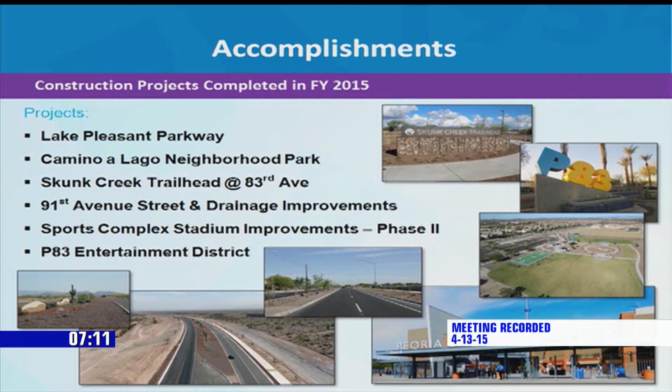Yes, on Lake Pleasant Parkway, we were approximately $1.5 million under budget on that project. I attribute a lot of that to the alternative delivery method that we used. We used a design-build delivery method, which was basically a 2-step process where we shortlisted a bunch of qualified contractors and design firms that teamed up together. We shortlisted 3 firms, and then we had them competitively price that project.

Because of that, we were assured that we were going to get a quality project from a contractor at a competitive price, which is sometimes not what you get when you just go with a straight low bid. Because of that and some other value engineering alternatives from that design build team, we were able to save $1.5 million on that project.

That savings went into the stadium improvements project, the phase 2 or phase 3 portion of the stadium improvements project that is currently underway.

Also on the 91st Avenue Street Improvements Project, we were able to save approximately $500,000. And then the last portion for the phase 3 improvements was the Truck Road Reliever Project, which also had a project savings of approximately $1.5 million. Not a bad day's work, huh?

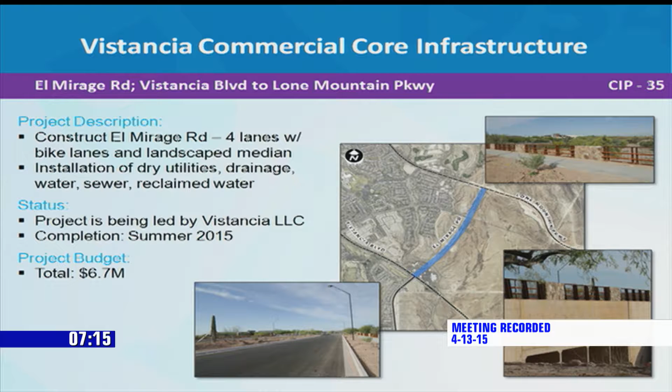Councilmember Leone: Yeah, I just want to ask you a question on that trail from Olive to Northern. When is that going to be done? I know they're working on it now. Response: Yeah, we anticipate, that's going to be one of my next slides, but we anticipate that to be completed this summer.

Any more questions? Sorry, go ahead. Our next project that we want to present is our Deer Valley Road improvements from 109th Avenue to Lake Pleasant Parkway.

This project was created out of a county project for the Deer Valley Road crossing from the El Mirage area, the Surprise area to the west, to 109th Avenue, that was going to increase the traffic on Deer Valley Road from approximately 12,000 cars per day up to about 30,000 cars per day. So we created a project to help reduce the impacts to the neighborhood from those traffic impacts.

It included intersection improvements at 107th Avenue to provide a signalized intersection, raised landscape median along that area for traffic mitigation and traffic calming. It improves the landscape basin on the northeast corner of 107th Avenue and Deer Valley, and adjacent wall improvements, which would be part of the phase 2 portion of this project. Let me explain more about that.

Right now, we're not sure when the county project is going to go forward, but we wanted to move forward with some of the streetscape improvements we had. So we phased this project so that the roadway improvements will be part of phase 1, and there's a phase 2 portion that we don't have a schedule for. We're waiting and communicating closely with the county on when their project will move forward, and in anticipation of that, we'll move forward with phase 2, which will include intersection improvements at 109th Avenue and Deer Valley, as well as raising the wall to mitigate noise concerns and traffic volumes along Deer Valley.

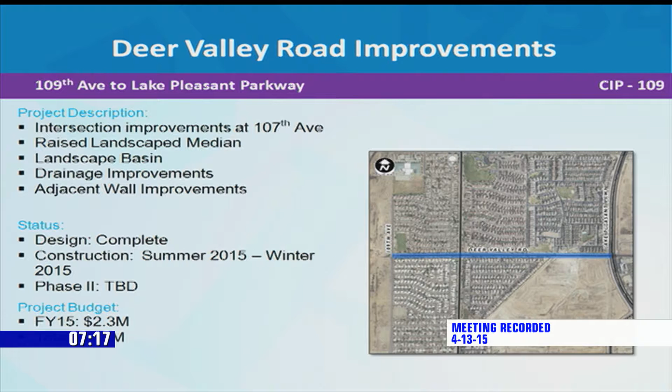The project Councilman Leone was referring to is our New River Trail from Northern to Olive, currently under construction. It's a federally funded, or partially federally funded, project that includes a combination of asphalt and concrete path with handrails, drinking fountain, and landscaping from Northern to Olive. It completes the Peoria southern leg of the New River Trail. When completed, we will connect to Glendale's trail system, creating a continuous trail from Bethany Home Road all the way up to Williams Road throughout the city of Peoria. We are also working to continue that trail north in the future.

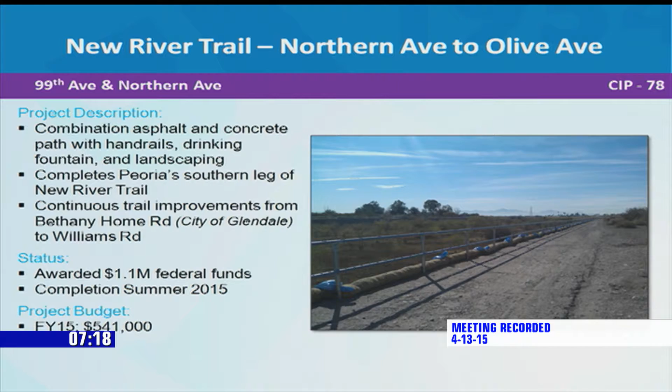Are we going to have any lights on there or something? I get people asking me about lights. They like to go walk through there at night, and since there's no lights, they're kind of scared they might see homeless people there, or coyotes coming through.

We currently don't have lights. Did I cross... a joke? Oh, I thought I said a joke.

Councilman Leone, mayor and members of council, one of the things we've evaluated over the past is adding lighting along the trail system. It's been a double-edged sword as far as maintenance of the lights, there's a lot of vandalism with the lights, as well as costs for the electricity. So we've looked at that. At some of the underpasses, like the Skunk Creek Bridge, we've added lights in areas that are a little darker, where you might potentially find people you may not want to find along the trail. So we've lighted those areas, but the entire trail system isn't lighted at this time.

I know there's some areas, like from Peoria on up, right behind the mobile home parks, where they don't want the lights. So you're going to get both sides, one wants lights and one doesn't. The ones who want the lights probably don't even live in the area, but the ones who don't want it live in the area. Right, okay, but it's not part of the scope of this project.

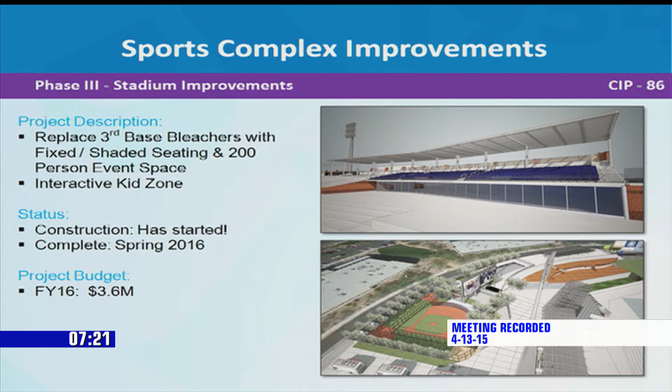We've got a significant amount of projects in design for fiscal year 2016. Here's a list of all our projects currently in design, or that will be starting design in fiscal year 2016, and we'll go through each of these individually.

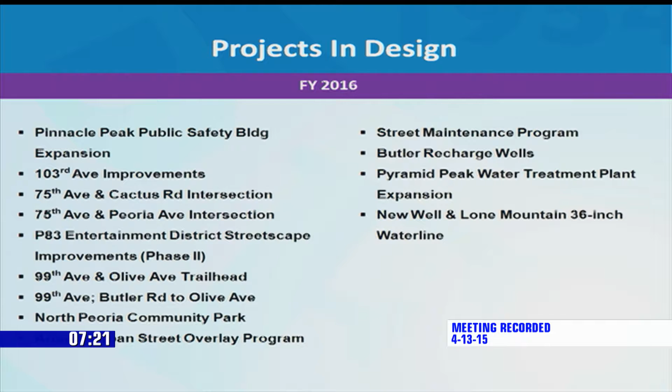First, our Pinnacle Peak Public Safety Building Expansion Project. We went out today for a solicitation for design, a one-step design-build, another alternative delivery method we have in place for this project, where a contractor and engineer will team up and provide a request for proposals with their qualifications. We'll shortlist and select a design-build team to design and construct the Pinnacle Peak Public Safety Facility expansion. As you know, last year we purchased approximately 6.1 acres north of the existing facility for this expansion.

This will include the roadway improvements along Pinnacle Peak and 102nd Avenue as part of this project. They're two separate projects, but we decided to include them since they need to be done at the same time for access to the Pinnacle Peak Safety Facility.

The funded portion of this project is the initial 15,000 square foot Phase 1 portion of the building that will help expand the existing facility and allow for new space. The police department at the northern facility is congested right now. They're having to share offices, and this will help as far as jail facilities and office space for all of the police, law enforcement officers up north.

Do we have a question? Yes.

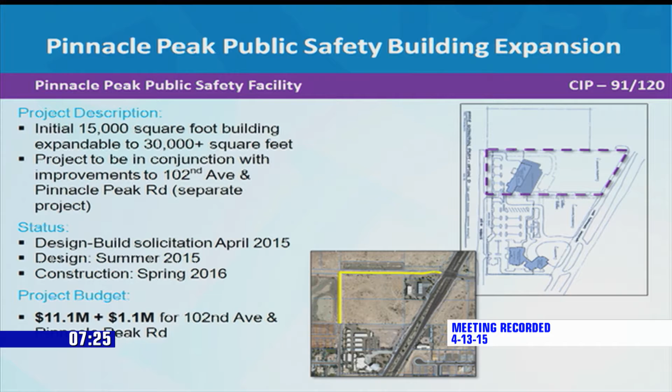It's county on the west side? Or east side? Well, it's county on the north side, and it's city on the south side. We don't have all the land to go forward to 102nd, and we don't really have the traffic volumes to warrant building the ultimate improvements at this point over to 107th Avenue.

The next project we have is our 103rd Avenue improvements from Northern to Olive. This project in our last capital year was a half-street improvement on the west side. We had geotechnical issues and a lot of heaving along the northern portion of 103rd Avenue on the west side. The whole road will need to be rebuilt. It's an old Glendale landfill along the west side, and some of that debris was buried underneath 103rd Avenue, and that's why we're having some geotechnical issues.

We've actually done some geotechnical investigation along that portion of roadway, and it's not as bad as we initially thought it would be. A lot of it's shallow waste that we can dig up and haul off and reconstruct that roadway. We also have a future development at the southeast corner of 103rd Avenue and Olive Avenue, and they're interested in dedicating right-of-way along that section of roadway to us at no cost, as long as we promise to provide them the improvements along there. So we're in the process of negotiating that out, and we think we can get the full street improvements along 103rd Avenue from Northern to Olive.

Our DCR, our design concept report, is complete for 103rd Avenue. We've selected a final design consultant that we will have under contract this month or next month, and we plan to start the final design and anticipation for construction in spring of 2016. Our project budget for fiscal year 16 is $4.8 million, and our overall total project budget is $5.1 million.

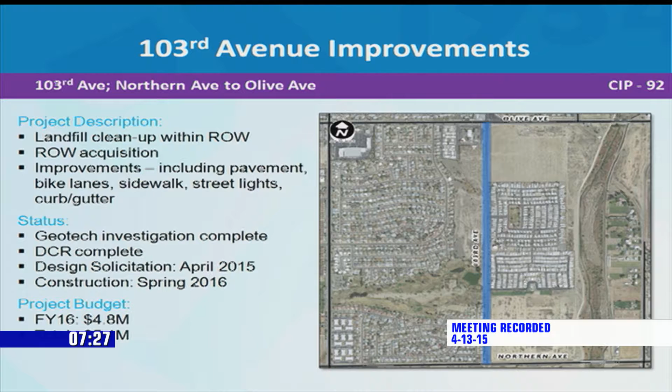Councilmember Leone asks: when they start doing the street, are they going to block up one side so people can get in and out, or are they going to cut it off altogether halfway, then go down?

We don't have a contractor selected for this project right now, but there will be multiple traffic control configurations in place during this project. We will always provide access to the adjacent neighborhoods, and we will work with them to make sure they are comfortable with it.

Are they going to pay for half that street? No, they will not pay for half the street. The agreement will be that they dedicate right-of-way for us, and then we will build the roadway improvements for them. Oh, okay, the right-of-way, I should say, sorry.

When are you going to start that, by the way? The development or the street? The construction - we're scheduled right now to start in spring of 2016. Okay, thank you.

The next two projects you'll see are very similar in nature, and they've been presented in past capital programs: our 75th Avenue and Cactus Road intersection improvements, and 75th Avenue and Peoria Avenue intersection improvements. Both will provide, when completed, 2 through lanes in each direction, plus bike lanes, dual left turn lanes at all legs of the intersection, or the capacity for dual left turn lanes.

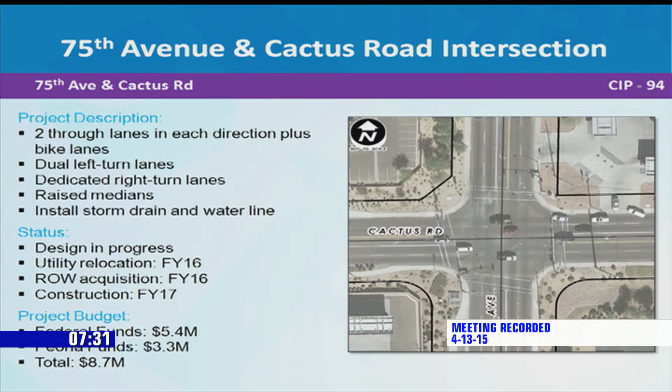Mr. Finn: Sorry, quick question, I might have missed it if I did, I apologize. What exactly are we trying to gain out of this particular project? I've seen some of the other ones - they need expansion, different things. I lived through 75th Avenue and Thunderbird and heard from the business owners in that intersection and how much they struggled, and I think a couple of businesses didn't make it. So I have a lot of concern about these next two projects, because I lived through it at 75th and Thunderbird, and I take back all the bad things I said about you when I was driving through there - well, most of them anyways.

So I have a meeting later on in the month, and I can probably get some of those questions answered, but I really have concern about the business owners, the ones that have signed 5-year leases, and all of a sudden massive road construction that could really hurt their business and potentially put them out of business. So I have a lot of concern about these next two projects and how they're going to roll out.

So I'll just leave it at that. I know I have a meeting later on in the month to talk to you guys about it, but I just wanted to voice my concerns tonight.

Yeah, and we can provide you, Councilman Finn, with a lot more detail at that meeting. But from a 30,000-foot level, the biggest thing this does is improve the traffic flow through the intersections. These intersections will grow and with development, traffic volumes increase.

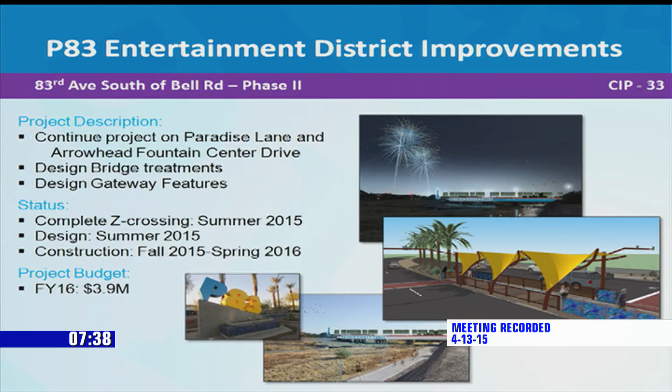Vice Mayor Edwards: Andy, in Phase 2, are we going to incorporate putting some cutaways in the existing brick wall of the businesses on the west side of 83rd Avenue? Because talking with the businesses, when the Z crossing is put in, that won't alleviate some of the problems because they'll have to cross the street and then go to either Mariners Way or the other exit.

So we need to make sure we've got some cutaways so that people can get through to the businesses. Yeah, that's our intent. As I stated earlier, the Z crossing was actually a remnant of the Phase 1 improvements that we couldn't get completed before spring training, so we're going to start it as soon as possible. Part of the scope of the Z crossing improvements is to cut away a certain portion of that wall and improve and connect to the adjacent businesses and the stadium parking lot.

Make sure you get with the HOA for that area and work with them to find out the most appropriate locations to do those cuts so that it impacts the businesses, and gets more people to the businesses quicker. Thank you.

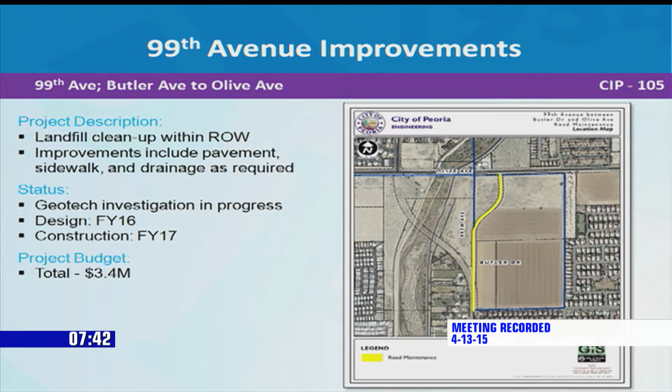Now they're gonna take out that dip. We'll look at where we can take out dips and provide drainage culverts underneath the roadway as much as possible, to improve the safety of the roadway as well as the condition of the asphalt itself.

The other question I have - I understand that, but years ago, I think Jeff was around then, maybe in the budget, they're supposed to build a bridge over Olive. And we gave the money to up north in the Ironwood district. Is there any way that we're going to build that bridge again?

I would say it isn't in our current capital project budget. We've estimated the project to cost anywhere from $15 to $18 million, just because of the bridge and the realignment of the roadway. So right now, it's not able to be accommodated in our capital program, but we do anticipate with this project we will improve that roadway along 99th Avenue in its current alignment, and then we will look in the future to programming the project.

Because you're going to have a lot of ultimate traffic alignment on 99th and Olive, people trying to get out to cross Olive, and there's no light there. And when you build all those new homes at Park West, it's going to be a heck of a job. Right now, if you go down there in the morning, you'll see a line of cars backed up about almost a half a mile to get across.

So that bridge could bring them over into what, Sun City? That was supposed to go? It'll put it into its ultimate alignment along 99th Avenue, yeah. Okay, thank you, Mayor.

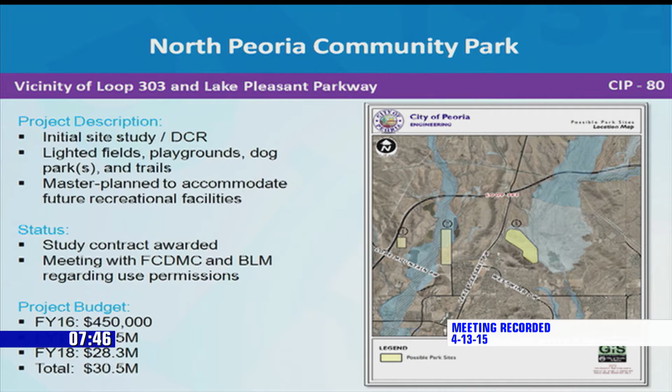On the positive side, it's an ideal site for a park, we think. The backdrop of the mountains just north of West Wing would make it a perfect site for a park amenity. It's separated from our developed residential communities as well as future residential communities in the area, so you won't have problems with lighted ball fields. It's adjacent to Lake Pleasant Parkway. We just think it would be an ideal site for a park, as long as we can get through all of the other jurisdictions and regulations.

But that's why we have to go through the siting study and provide the feasibility for putting it there versus one of these other sites or potentially another site. The benefits of these 3 sites are they're all owned by the federal government. They're all BLM land with other easements over them, or at least sites 2 and 3. If one of these sites didn't work and we had to go to a private property owner or state land, we would have to purchase 120 acres, and it would be a significant impact to our $30 million budget.

So that's why we want to go through this process first. We've got a $450,000 budget for fiscal year 16 to do that siting study and preliminary design of a park. Then in fiscal year 17 is the final design budget of $1.75 million. And then the ultimate construction is budgeted in fiscal year 18 at $28.3 million, for a total budget of $30.5 million.